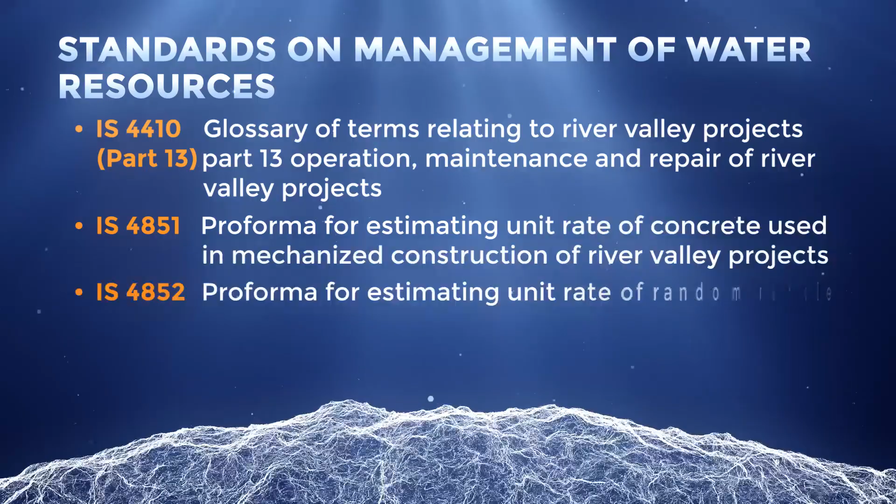Another important category pertains to river training works covering structures like embankments, groins, revetments, etc. Lastly, we deal with standards on management of water resources projects. Here we developed standards such as progress report and completion report of river valley projects.

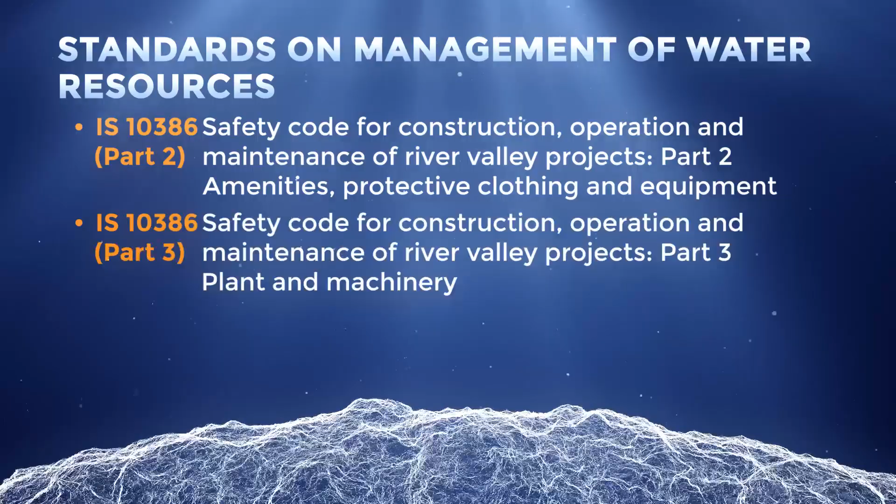We also formulate safety codes in construction, operation and maintenance of river valley projects. Beyond this, we also work on subjects such as estimating unit rate for civil works, etc.

Now that we know the functional aspects of how the technical committees operate, let's take a closer look at their areas of operation. Dams, barrages and weirs are man-made barrier structures built across a stream or a river that stop and regulate the flow of water in controlled fashion. Indian standards ensure that dams built in India are safe, economical and durable, and are fit and functional to serve the nation.

Let's hear about this in detail from our expert. Let's talk about the Indian standards for dams and canals in our country.

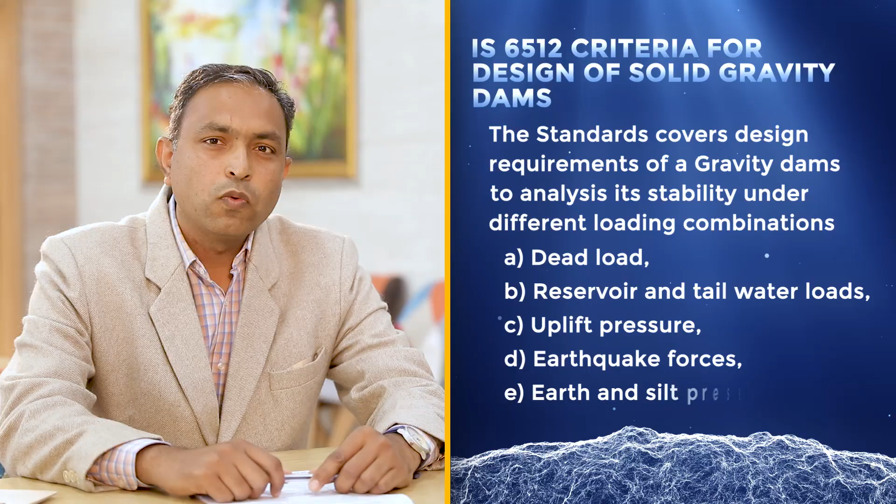IS 6512 is one of the important standards which gives the design criteria for any solid gravity dam. Design analysis is a crucial part for any dam before its construction. This stability analysis takes into account several critical load combinations. The standard gives 7 different load combinations, mainly the dead load, reservoir and tailwater loads, uplift pressure, earthquake forces, earth and silt pressure, ice pressure, wind pressure, wave pressure and thermal loads.

We have one more important standard, IS 11855, for design and use of rubber seals for hydraulic gates. This standard gives recommendations and covers 6 different types of seals depending upon their shapes, namely angle-shaped seal, flat seal, music note seal, double caisson seals, double bulb seals and corner seals.

It also lays down 6 important parameters to control quality checks, comprising tensile and elongation test, shore hardness test, water absorption, weather impact test and its materials. The standard also covers an important requirement of cladded seals. The cladded seals have fluorocarbon cladding done to reduce frictional forces. The standard also gives the test requirements of adhesion test.

Dams also need to have certain appurtenant structures to enable them to discharge their operational functions safely and effectively. A number of standards are in place to ensure this.

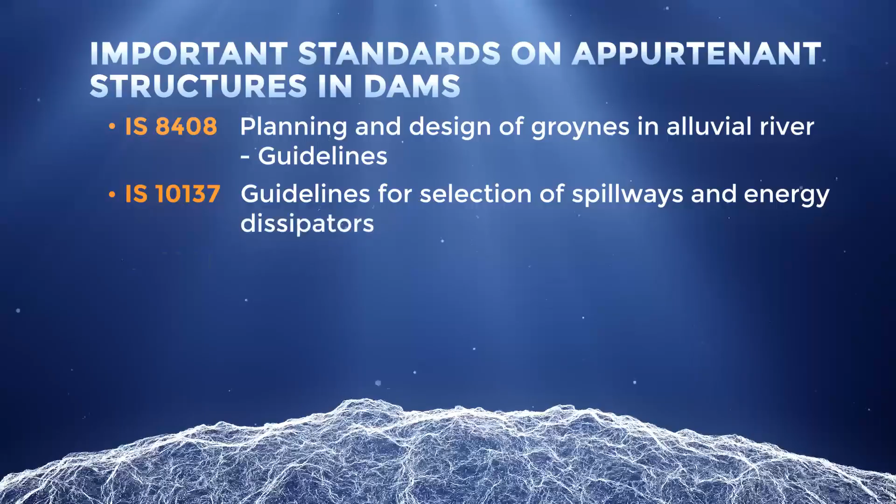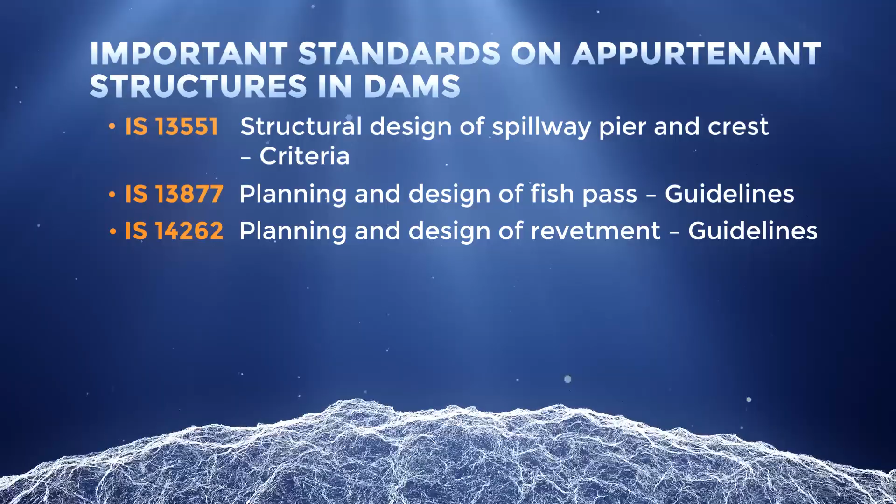Dam as a structure is not alone. We have many more standards on appurtenant structures. IS 11527 is a standard that deals with the structural design of energy dissipators for the spillways.

Energy dissipators are important structures to protect the erosion on the downstream part of any dam or spillways. The design of downstream protection works or energy dissipators below hydraulic structures occupy a vital place in the design and construction of dams, barrages and outlets. The standard covers hydraulic jump type, stilling basin and bucket type energy dissipators below spillways and outlet works founded on rock.

We see that in the standard, the structural design of floor slab consists of the following steps: determination of uplift forces, details of anchorages into bedrock, that is diameter, number and spacing of anchor bars, determination of the length considering dislodgement of rock mass against uplift force, and working out details of slab reinforcement.

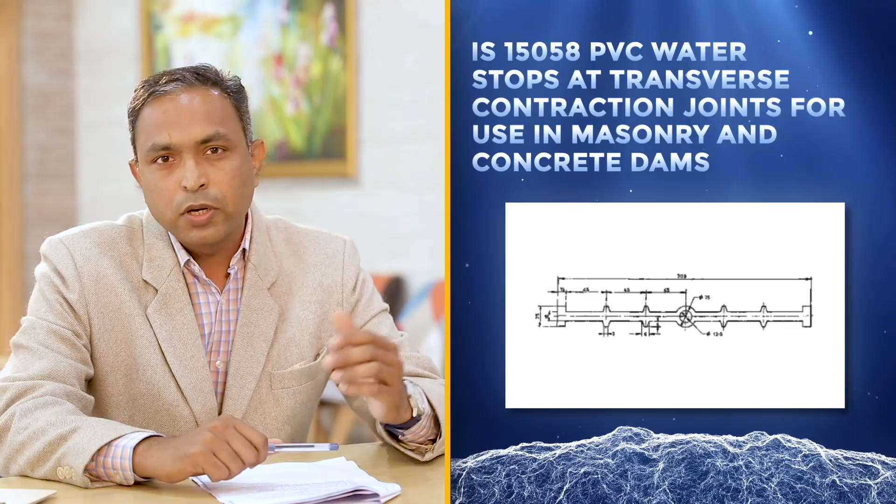IS 15058 is another standard on PVC water stops. These water stops are used at transverse contraction joints for use in masonry and concrete dams. The contraction joints in masonry and concrete dams provide passage through the dam which, unless sealed, would permit the leakage from the reservoir to the downstream face, and this could be harmful to the structure.

To check this leakage, water stops are installed in the joints adjacent to the upstream face. The standard takes care of the quality of this product and covers 12 different parameters to check the quality, right from its material, aging, weather impact, weight, water absorption and its dimensions. The standard is BIS certifiable and presently we have 6 BIS licenses against this standard.

Water release from dams may also be controlled using gates and shutters. The Bureau of Indian Standards Code IS 13623, criteria for choice of gates and hoists, provides the basic classification of gates. IS 5620 gives recommendations for structural design criteria for low-head slide gates.

BIS has developed a vast array of Indian standards for planning, design, construction and maintenance of various types of dams and their components. Before we move on to the next category, let's take a brief look at some key standards within this area.

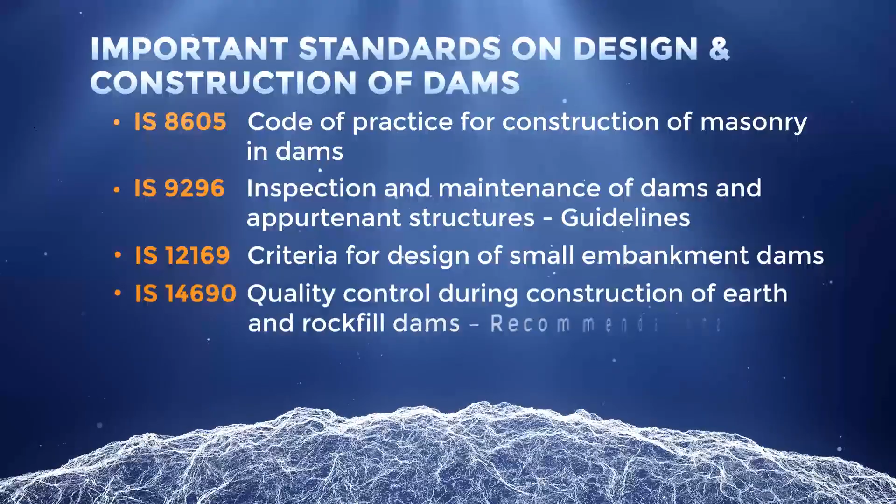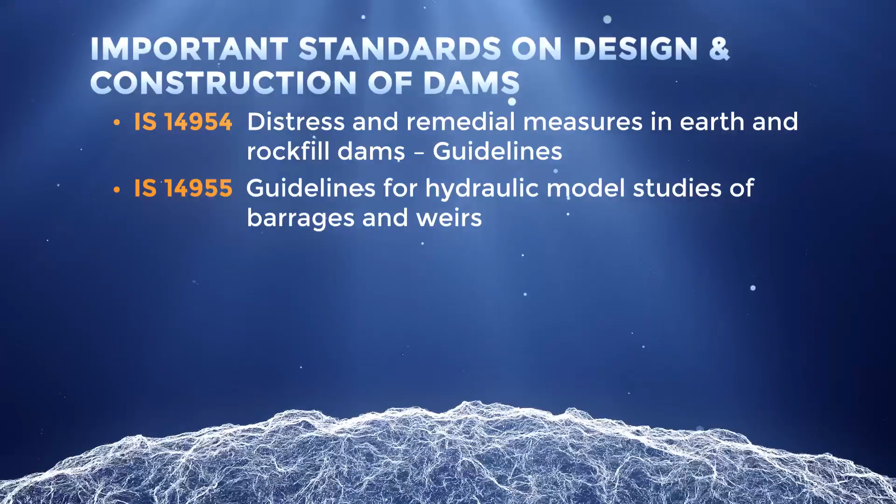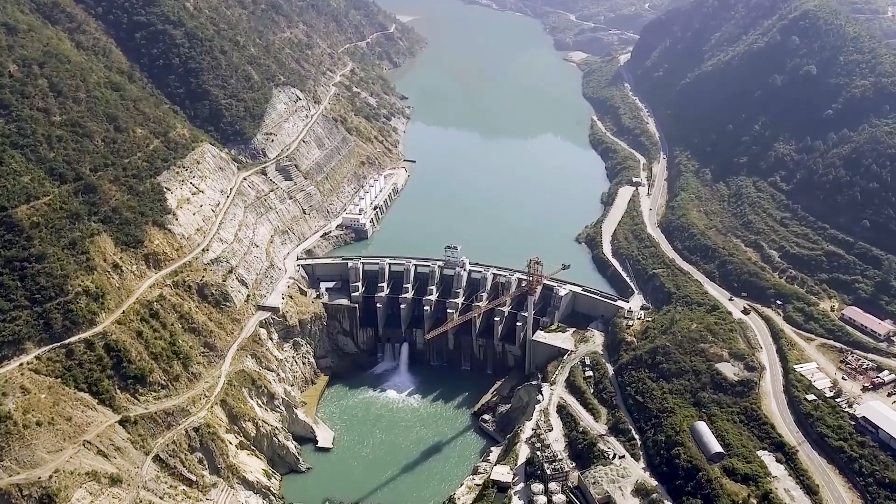Now, for our next subcategory under surface water is reservoirs and lakes. A reservoir is a man-made lake that is created when a dam is built on a river. They are different from natural lakes. In these, river water gets blocked by dams and is collected behind the dam, creating a reservoir.

We already know reservoirs are used to generate hydropower. They also have a host of other benefits. First, during seasonal high flow of rivers, they limit the amount of water allowed to continue downstream. Through this, reservoirs help control flooding. Secondly, during dry seasons, water is released from the reservoir through canals. This enables farmers to water their crops and industries to function without interruption.

Do you know what's the most common problem with reservoirs? You might not want to believe it, but it's as simple as evaporation. A huge quantity of water is lost from reservoirs through evaporation. However, substantial quantity of water can be conserved by control of this evaporation.

We have a standard, IS 14654, minimizing evaporation losses from reservoir, which stipulates the methods and guidelines for reduction of evaporation losses from water bodies, with special reference to control of evaporation with chemical retardants. IS 6939 is another standard that provides methods for determination of evaporation from reservoirs. BIS standard also covers other measures available for control of evaporation, like the installation of floating solar panels on the reservoir.

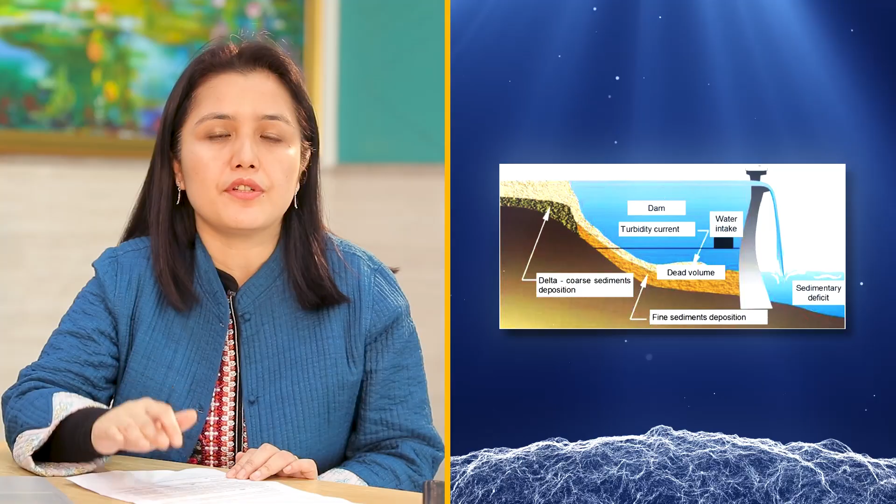IS 13665 is a standard that stipulates methods for assessment of reservoir sedimentation. Sediment entering a storage reservoir gets deposited progressively over time, causing the bed level near the dam to rise and reducing the reservoir's capacity. Several methods are used for predicting sediment distribution in reservoirs for design purposes, such as the empirical area reduction method or the area increment method.

IS 5477 Part 2 lays down methods for computing sediment yield and for predicting the probable sediment distribution in the reservoir. Let's hear about this in detail from our expert.

IIT Roorkee, since its earlier version as University of Roorkee, has been involved in the planning, design and construction related activities of major water resource projects such as Bhakra Dam, Hirakud Dam and Tehri Dam in the country. Research inputs from academic and research institutions are appropriately incorporated in the Indian standards and guidelines prepared by the Bureau of Indian Standards, and are at par with international standards.

The Government of India has focused on river rejuvenation, water conservation and water reuse. Thus, there is a need for revisiting existing standards and introducing new standards to meet such requirements for the health of existing water bodies and availability of safe water.

Water from reservoirs and barrages is released through canals, which have an important role to play in India's rural economy. This released water is further utilized for irrigation in far-flung areas. BIS has developed the standard IS 6531, which gives design requirements for canal head regulators. IS 9447 gives guidelines for assessment of seepage losses in canals. IS 4701 is a standard for earthwork on canals.

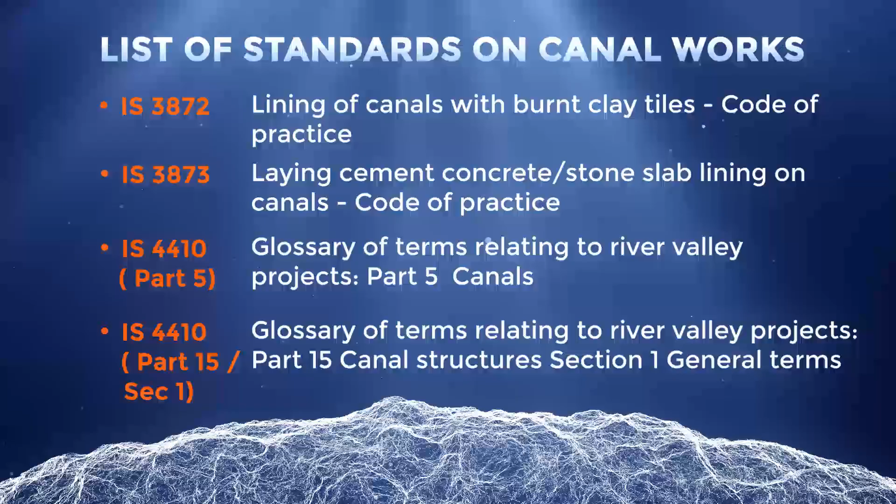Let's hear about this in detail from our expert. We have another important part of our water resource sector: canals. Canals are the major source of irrigation in our country. Apart from design, layout and planning of canals, a number of standards have been framed on lining of canals. Let's talk about a few of them.

IS 9698 is one of the important standards which gives lining of canals with PE films, that is polyethylene films. The standard lays down the practice for use of PE film as canal lining, preventing seepage losses and improving the velocity of flow. The standard covers both low density and high density type PE films according to the requirements of IS 2508 and IS 10889.

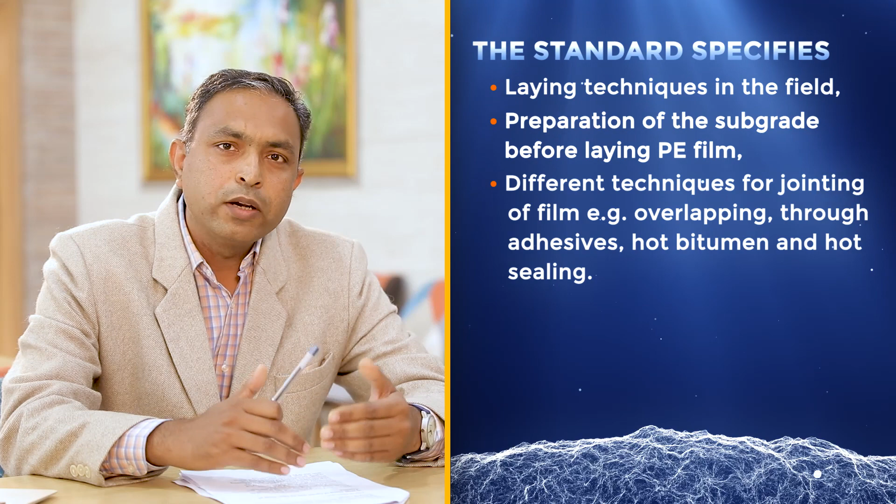The standard specifies laying techniques in the field, preparation of the subgrade before laying the PE film, and different techniques for jointing of films, for example overlapping through adhesive, hot bitumen and hot sealing. It also guides us with do's and don'ts for the use of this PE film as canal lining. We have one more important standard, IS 10646.

The standard deals with canal lining of cement concrete tiles and is BIS certifiable for cement concrete tiles as canal lining. It gives material requirements for tiles, referencing different cements and requirements for aggregates conforming to IS 383. The standard specifies the dimensions of tiles and gives the test to check quality through the flexure test, which has a minimum breaking load requirement from 18 to 41 kg for different thicknesses.

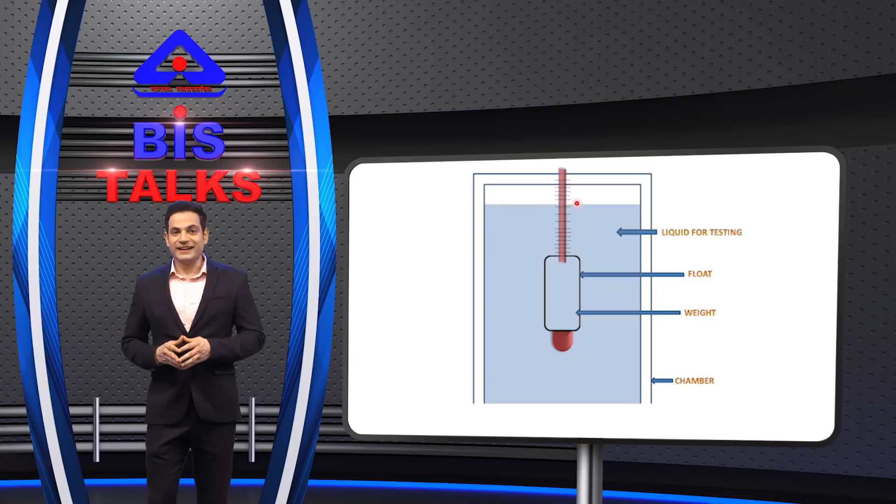Now for hydrometry, another emerging and critical area, BIS has also developed a number of standards in the domain in terms of measurement of liquid flow and discharge in open channels and closed conduits by various methods. Here is the list of some important standards.

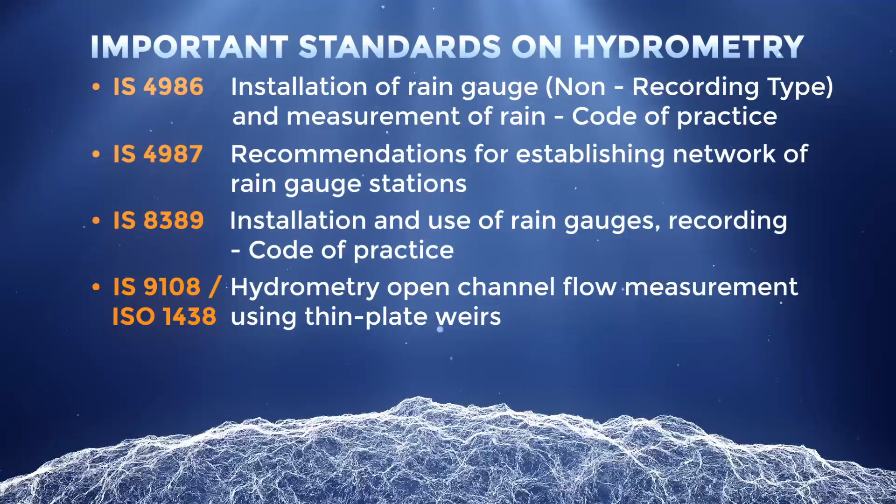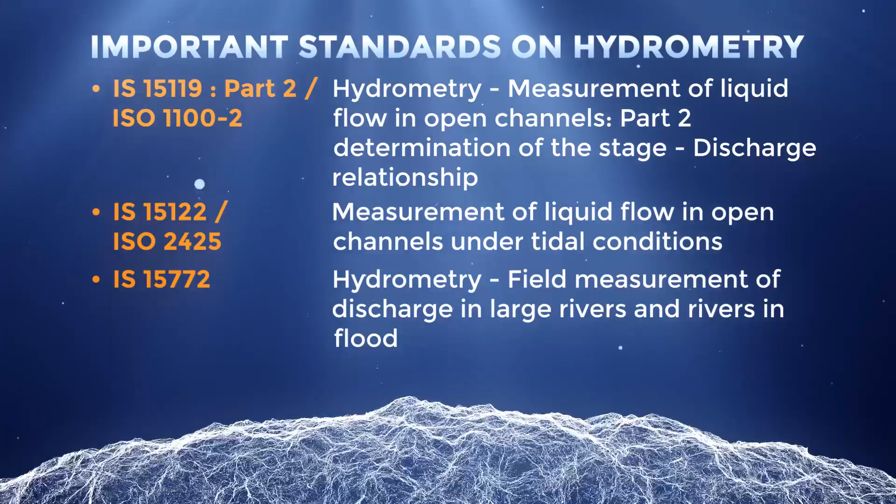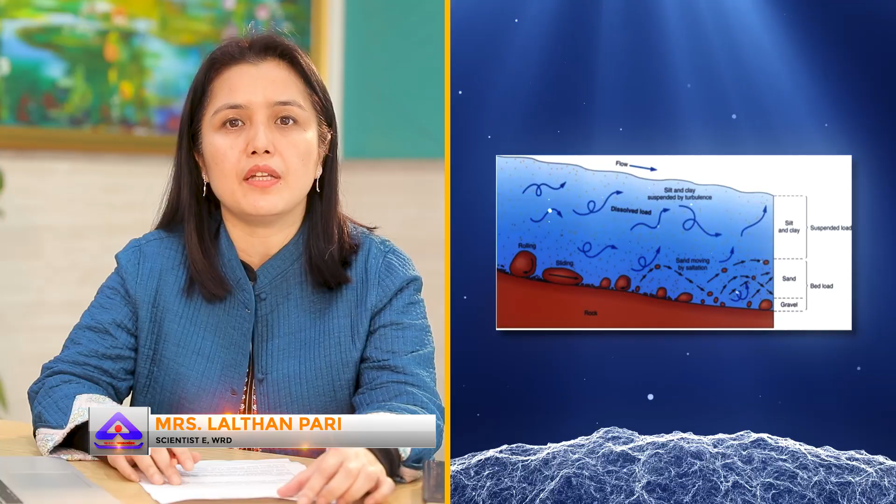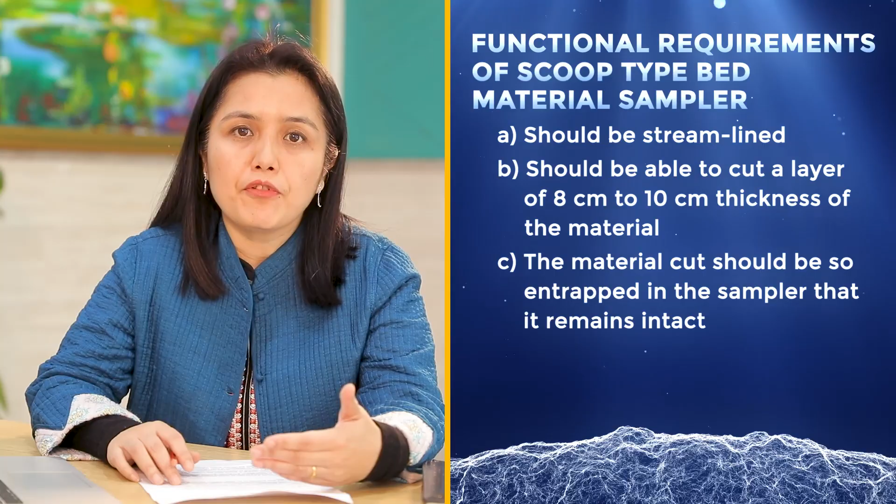Insoluble materials like silt, sand and gravel transported by streams create problems in the operation of many river valley projects. Therefore, to have adequate knowledge of the movement of sediments, systematic sampling of sediment is required. IS 3917 scoop type bed material samplers is a standard that specifies functional requirements, such as the sampler being able to cut a layer of 8 cm to 10 cm thickness. It also specifies performance test requirements and material to be used for manufacturing various parts of the sampler.

Other important standards under hydrometry are IS 16571, measurement of liquid flow in open channels using the moving boat method. This standard specifies methods for measurement of discharge in large rivers.

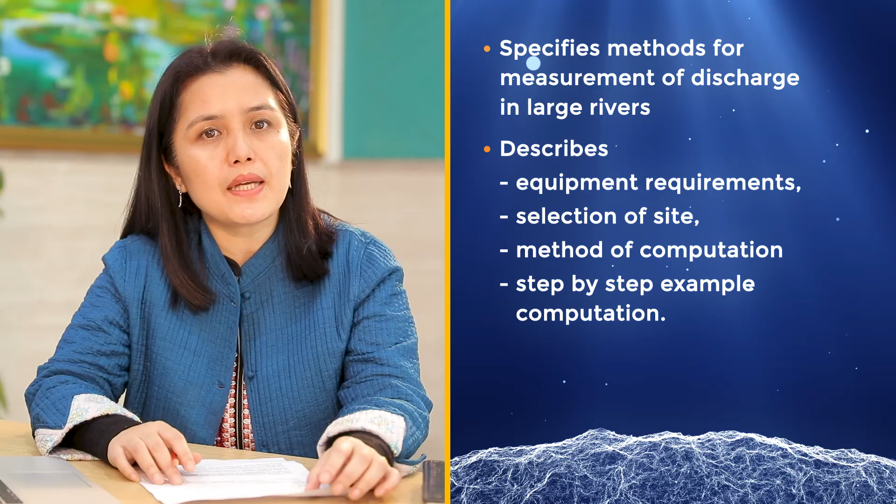The standard describes equipment requirements, selection of site, method of computation, and also contains a step-by-step example computation by moving boat method. IS 16138 is a standard which gives guidelines for the design, selection, and use of electromagnetic current meters for measurement of liquid velocity in open channels.

BIS has also taken an active role in the ISO committees in the field of hydrometry. Let's get more clarity on this subject matter from our expert.

BIS is working in close liaison with ISO in the area of standardization on hydrometry. BIS holds the secretariat of the committee ISO TC 113 on hydrometry and its subcommittees SC1 velocity area methods and SC6 sediment transport since the inception of the committee in the year 1964. Indian experts actively contribute in the formulation of ISO standards on hydrometry and hold prominent leadership positions such as chair, convener, and project leaders. BIS has adopted many ISO standards on hydrometry to align with the latest technologies as well.

Currently, India is going through a severe groundwater crisis. This is largely due to severe over-extraction and groundwater contamination, covering nearly 60% of all districts in India. Besides, recharge of groundwater is slow as a large quantity of surface runoffs gets washed to rivers and oceans.

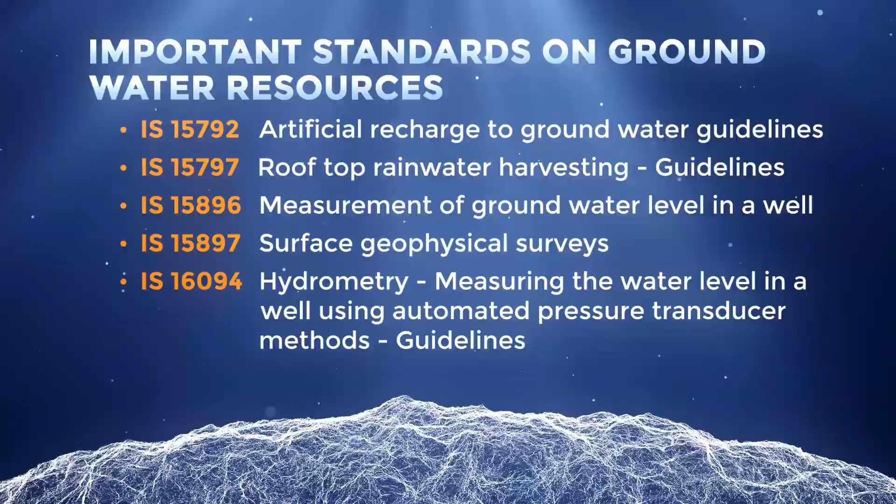Excessive use of groundwater for various applications has resulted in lowering of groundwater levels, causing adverse environmental impacts. Artificial recharge to groundwater refers to augmentation of groundwater resources using surplus surface water available.

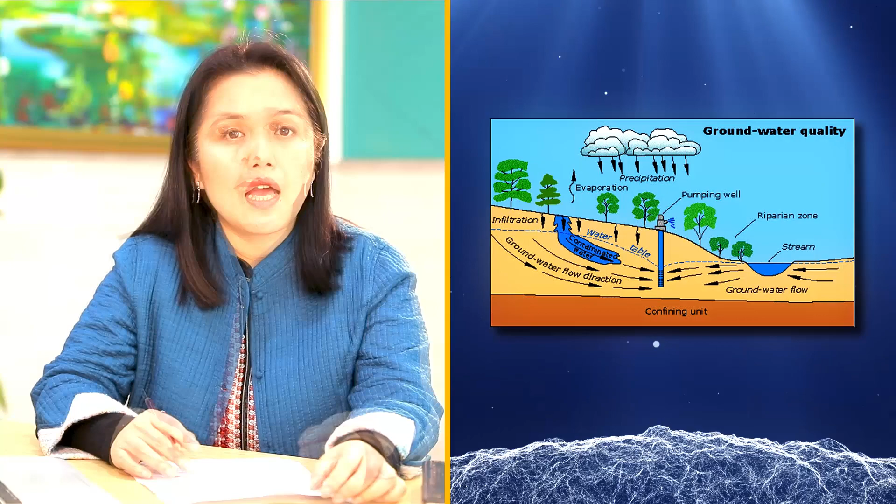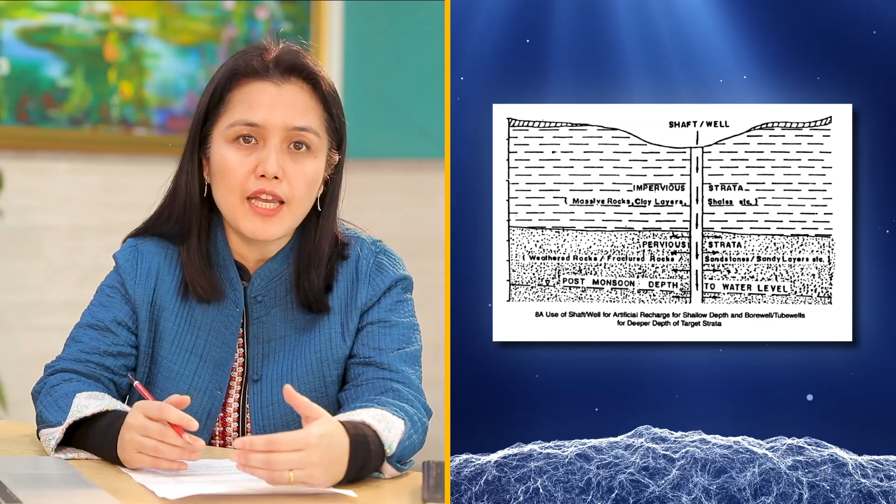In this regard, there is a standard IS 15792, Artificial Recharge to Groundwater, that provides various techniques and methods of artificial recharge by modifying the natural movement of the surface water. The standard provides guidelines for the basic requirements for artificial recharge projects and its planning, such as identification of the areas, requirements for technical inputs like remote sensing studies, soil infiltration studies, hydrological studies, etc.

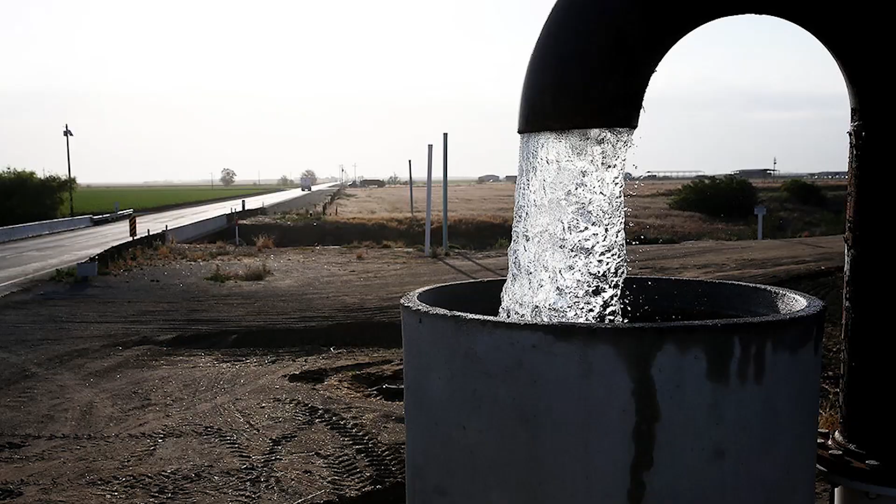In terms of groundwater resources, there are many other important areas where BIS has developed standards, like IS 15797, guidelines for rooftop rainwater harvesting, and IS 15897, which provides the specifics of surface geophysical surveys for hydrogeological studies. For a detailed list, please check the program of work under WRD 3, Groundwater and Related Investigations Sectional Committee.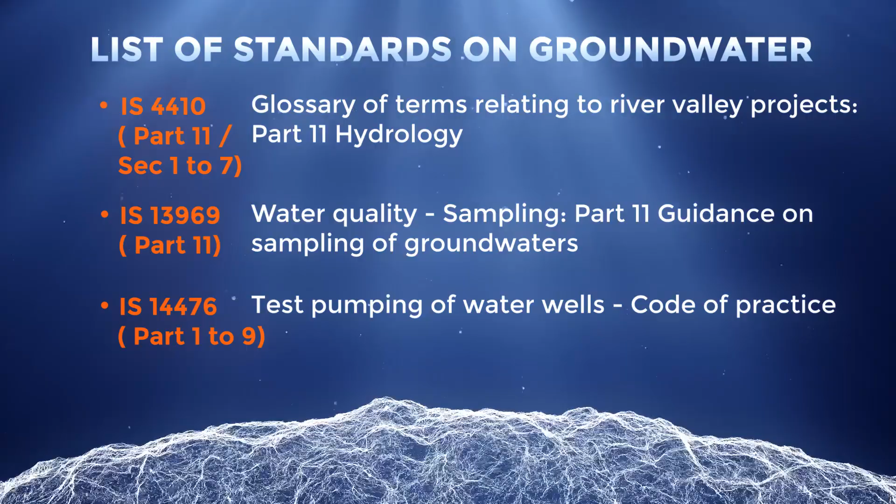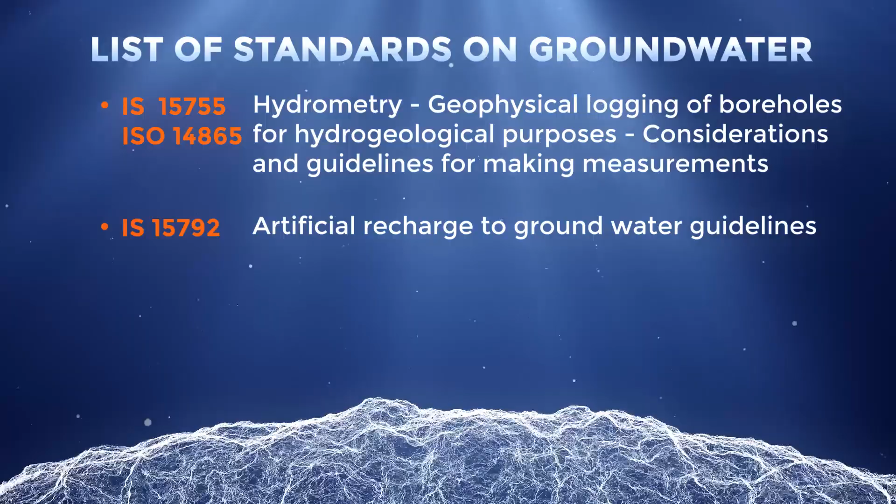India is the largest user of groundwater in the world. About one fourth of the global groundwater withdrawal occurs in India. Hence, there is a dire necessity to standardize the methods and procedures for survey, assessment, monitoring and management of groundwater.

Standards provide technical specifications, enabling guidelines and precise criteria for the activities. Standards also help to reduce errors, facilitate problem solving and also increase the reliability and effectiveness of outputs. Standards in some aspects of groundwater like geophysics, artificial recharge and also groundwater measurement have already been developed by BIS.

A few new subjects have also been taken up for standardization. Just to mention a few: guidelines for aquifer mapping, mathematical modeling of groundwater, impact assessment techniques for artificial recharge schemes, interaction of groundwater and surface water assessment, guidelines for surface runoff harvesting using small structures. These standards will help in a long way to achieve the desired results in groundwater sector.

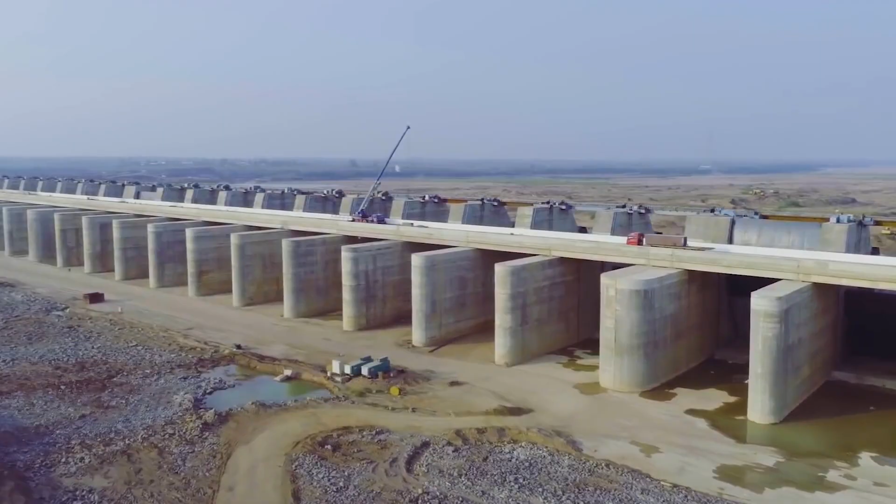Evidently, these water resources projects demand meticulous planning before execution. This is to make sure that adverse impacts do not outweigh the benefits expected from the projects. To address this, BIS has developed standards IS 15845 and IS 15442 for environment management plan and parameters for environmental impact assessment of water resource projects.

Here is the list of some important standards.

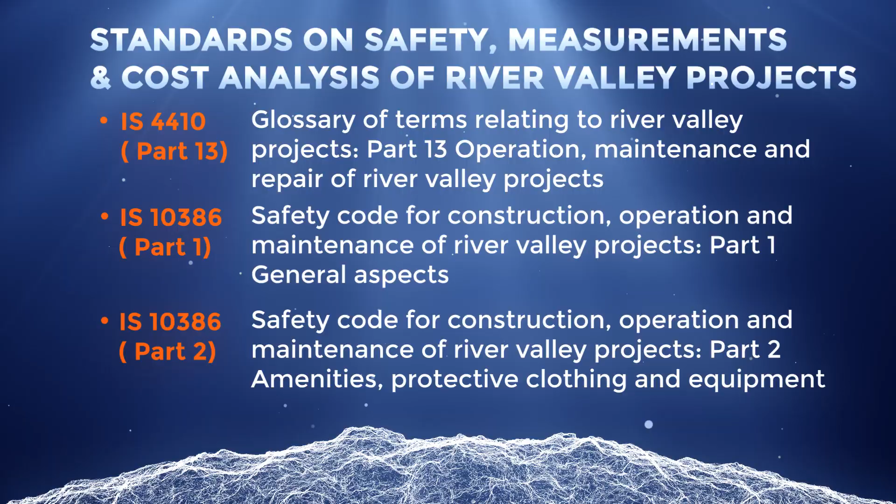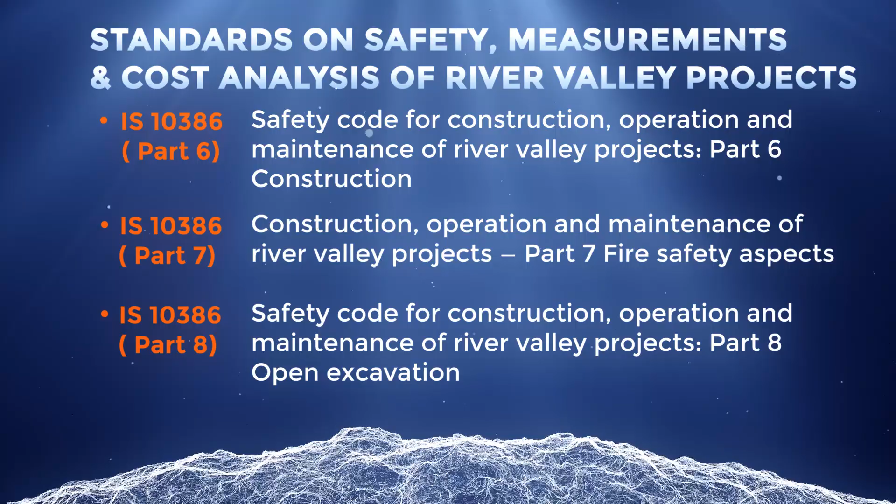BIS has framed standards to cover every corner over the vast spectrum in river valley projects. There are also guidelines for a vast spectrum of areas within the sector. For instance, presentation of project and progress report, completion report of river valley projects, safety codes in construction, operation and maintenance, estimating unit rate for civil works, measurement of works in construction of dams and appurtenant structures, etc.

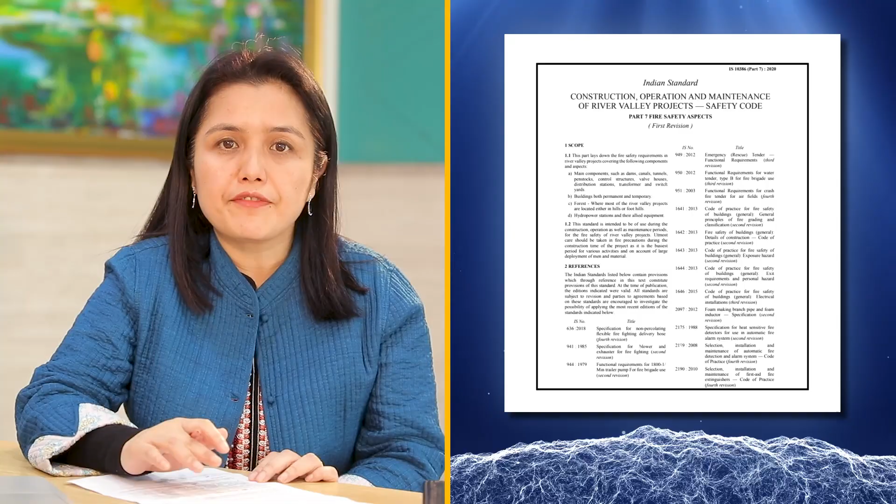Outbreak of fire in the river valley projects can cause extensive damages to the buildings and equipments. For this, we have IS 10386, Construction, Operation and Maintenance of River Valley Projects, Part 7, Fire Safety Aspects. This standard lays down the fire safety requirements in the river valley projects. The standard is intended to be of use during the construction, operation as well as maintenance periods for the fire safety of river valley projects. It covers fire safety aspects of dams, canals, tunnels, etc., buildings, forest, hydropower stations and their allied equipment.

We need to talk about another important category, that of river training works. This involves structures that are constructed around the river to guide the flow of water, prevent erosion, protect the embankment, and stabilize the structures.

Guide banks are protective or training embankments constructed at the side of a weir, bridge, etc. to guide the river through the waterway provided in the structure.

We understand that flood is another important aspect in the water resource sector. BIS also caters to the problem of floods in rivers through its sectional committee WRD 22, that is, flood management, erosion management and diversion works. Let's talk about one of the standards, IS 13877, that is, planning and design of fish passes.

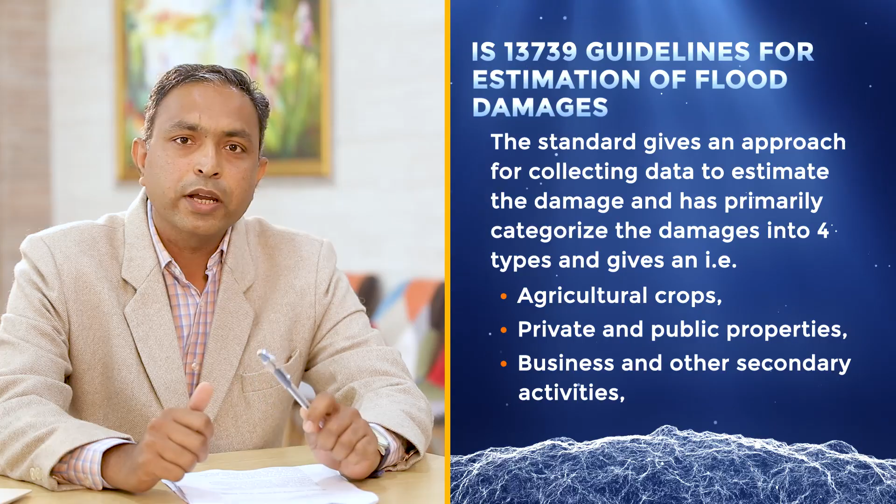The standard gives an approach for collecting data to estimate the damage and has primarily categorized these kinds of damages into 4 types: agricultural crops; private and public properties; business and other secondary activities; spread of epidemic, health and loss of livestock, fear, anxiety and distress.

As we have seen, the Water Resources Department has brought out standards covering every aspect of water resource management, from planning to design, construction and maintenance of river valley projects, in subjects ranging from hydrometry to geological investigations, river protection, construction safety, environmental impact assessment and flood control.

To address the various emerging challenges and keeping in view the latest technological developments, BIS is striving to frame standards on areas which are the need of the hour. We are considering development of standards to prolong the life of dams by addressing silt control and silt removal techniques. It is one of the major areas of concern today.

To regulate the distribution of water as per need, our committees are working on piped irrigation network, specifying the process, testing and material quality. We are also working on new cost-effective areas like CFR dams, piano key weirs, roller compacted RCC dams, etc.

Considering the immense damage caused by floods, subjects like flood forecasting, real-time reservoir inflow forecasting with neural algorithms and other computational techniques are being considered.

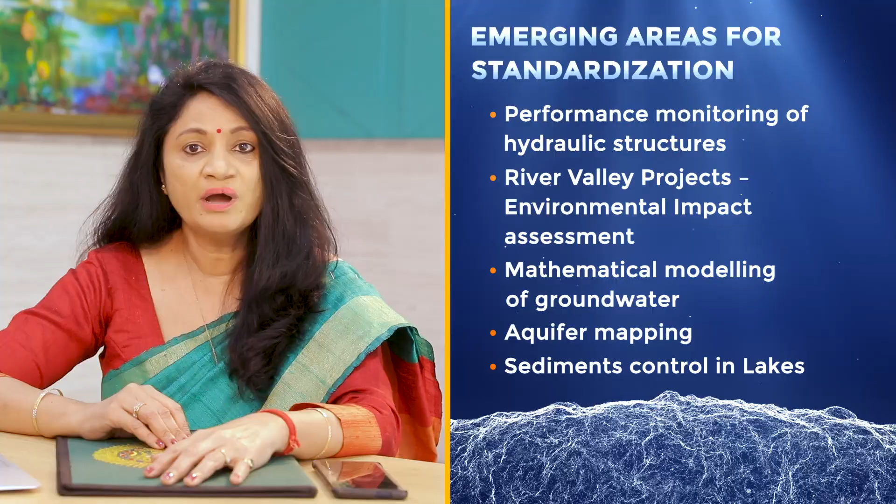Besides, BIS is committed to continuously revise the existing standards to incorporate the latest technological advancements and ensure that Indian standards are at par with international standards. That's all for now in this chapter of BIS Talks.